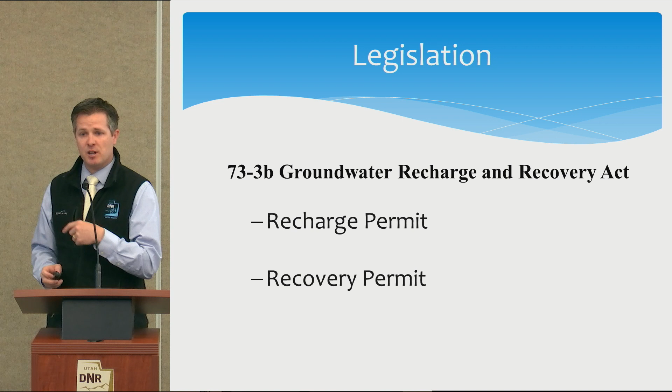A recharge permit is actually a smaller fee than the recovery permit, which is larger. But the recharge permit fee is dependent upon the amount of water you're going to be recharging, or the description of your project. So if it's a very small amount, less than 20 acre-feet, your fee for a recharge permit is just $150 — a very small fee.

The larger the project, the higher that fee goes, and there's just this schedule. It's the same fee you'd have if you were filing a temporary application with us or a change application — it's a standard fee for all those projects. It used to not be that way, so if you're expecting a big, large fee for this, it's changed. It's now just the standard fee if you're doing a recharge application.

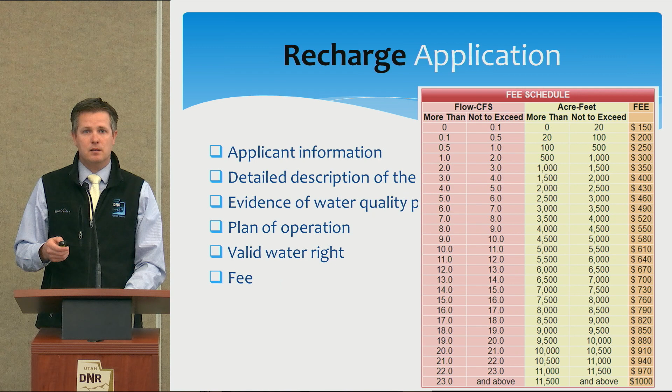Let me make sure here. Yeah, water quality permits. So our application for a recharge application has a condition that you have the appropriate water quality permits required by these other divisions to recharge water into the groundwater.

I'll allow them to talk about their permits, but the thing we require is that you have those permits. We don't make you get them before you file with us, so you can do them in tandem. You could file the necessary applications with their offices at the same time you're filing with our office, but we'll condition your approval on having those permits in hand before you recharge that aquifer. If you do have those permits ahead of time, those are great things to attach to your application. Many times we'll get their application attached to ours to show they've been working with their office and filed those permits.

Many times when they do issue those permits, people will provide that to us as supplemental documentation to show those have been completed. We'll want those at our office at some point, either before or after the application is filed, to know those have been completed and done. But I'll allow them time to talk about those. The key takeaway is you can do those in tandem, not in series.

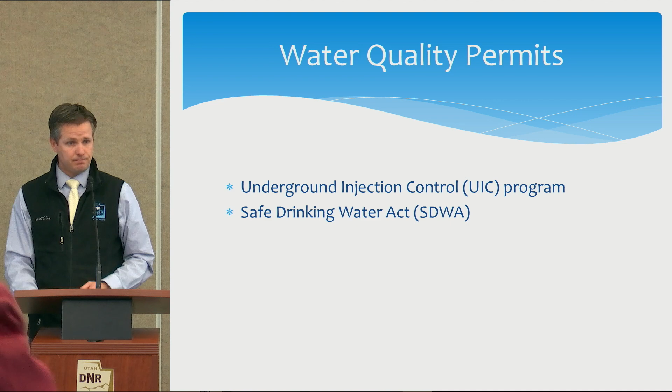Okay, so our recharge application talks about a plan of operation that you need to have when you file for a recharge application. Essentially that's a detailed description of the project. What's your design capacity? How much water are you going to be recharging?

It also talks about a monitoring program. What's your monitoring program? A monitoring program is different depending on the type of application. We don't have set rules saying for this type you're going to do this; we look at each one individually and come up with a program for each. A monitoring program for, say, an injection well type is obviously going to require that you meter how much water you're injecting. That's part of the monitoring program.

Many times we'll also talk about having some monitoring wells set up around that injection. Depending on the project, you might not need any, but you might need some to help understand how much water is actually being recharged and how that water is moving through the system.

For an infiltration pond, the monitoring program is going to be a little different. Let me catch up with my notes here to make sure I don't miss anything. For a well, it's very easy to measure how much is being injected into the ground. For an infiltration basin, it's more difficult to understand and know how much water is actually infiltrating into the aquifer system.

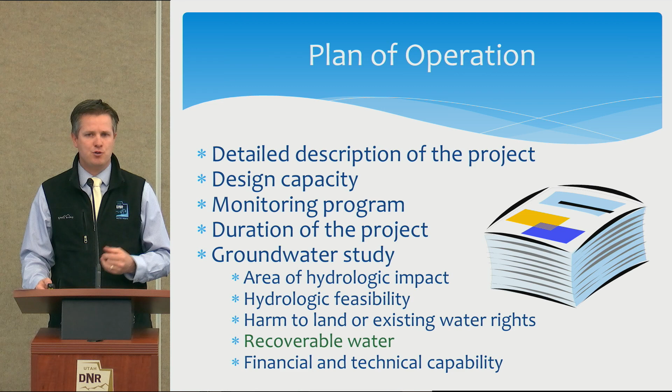And then I've highlighted in green here, how much water do you believe is going to be recoverable from this project? When I talk about the recovery application, I'll talk about what that means in a lot of detail. And does your entity have the financial and technical capability to complete this project? I don't think that's ever been an issue with someone, but it could be in the future for these types of projects.

This plan of operation we're talking about, I heavily encourage entities to do a pilot project, right? A recharge application is a pretty simple application. I believe in our office it's something we can easily act on. So one of the key takeaways here: even for a pilot project, we want you to file a recharge application, okay? There have been times in the past when we haven't required that or have had differences of opinion, but now, if you're going to recharge water in the ground, even for a pilot project, we want a recharge application filed. And I think we can act on those relatively quickly.

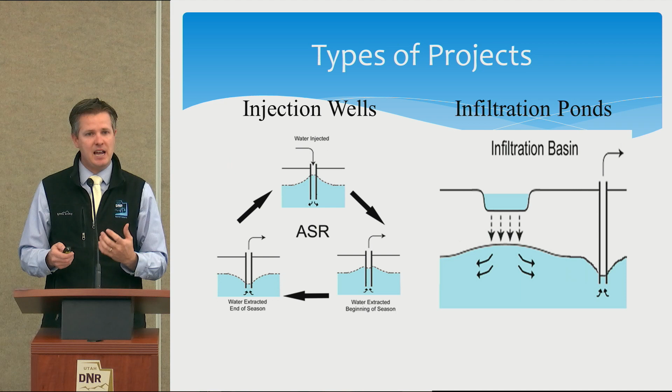Those pilot projects help, and if you're doing an application for a pilot project, you note that on your application. Say, this is for a pilot project. All of this information, the plan of operation, the design capacity, the monitoring program, we're going to develop that with our pilot project, right? So you don't have to have all the answers up front. You're going to use that pilot project to help define those answers. So you file that recharge application. It helps you understand the feasibility and it helps you define all those parameters.

Okay? So later on, when you say, we've done our pilot project, now we're ready to file the encompassing recharge application, you can do another application which is much larger, so the fee might be greater, to say this is our full application based on the parameters of our pilot project. Okay?

So I want to spend a lot of time talking about valid water rights. I'm sure that's probably small to read. I just want it on the slides. All of these slides will be available; I think some have been printed out, but they'll all be available on our website. And this recording will also be available on our website for you to download and view for your future reading enjoyment.

But a valid water right is very, very critical. Okay? To do a recharge project, you have to have a valid water right, or permission from an agreement with another entity to use their valid water right.

And that water right has to have the ability for you to store that water, right? So, for example, you can't take an irrigation water right that has a season of use for the summer, go to a spring that you're using for that water right, take that water out during the winter and store it, and then try to pull it out to use for your irrigation in the summer. If your water right's limited to a summer time frame, you can't go beyond your water right to store that water in the winter time, right?

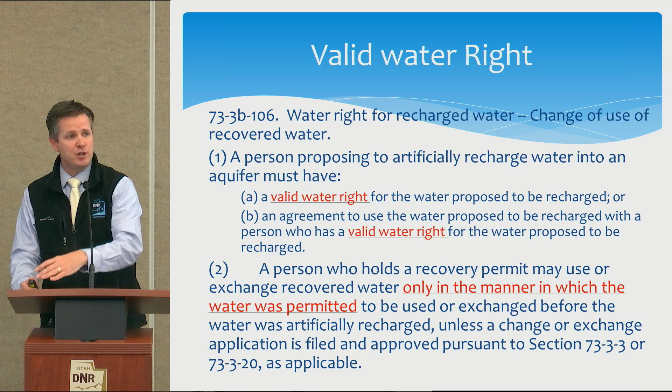So if you already have a municipal water right that you're filing a recharge application on to store in the groundwater, and then you're going to pull it back out to use for municipal, that's just fine. But if you have an irrigation water right or some other type of water right and you want to use it for something else, you have to file a change application when you go to use that water right. Okay? Any questions on water rights? So when you file your recharge application, you're going to point to the water rights that you're using to recharge that water. Okay. Any questions on recharge applications as a whole before I move on to recovery applications?

Okay, so a recovery application, separate. Once again, we need the applicant information.

What's interesting in the law is it's set up that you can file multiple recovery applications on one recharge application. There was this idea that an entity could file for a recharge and different entities would file to recover that water. That's never happened, but you can do that. So you also need the consent from the owner of a recharge permit that you can recover their water. Most of the time it's been the same entity, so we're pretty sure that entity has the consent of themselves to do it. But you would need that consent if you were a different entity.

The recovery application has the wells that you're going to be recovering that water. Many times, if it's the same well you're pumping down, you're going to be recovering out of. But it doesn't have to be, especially for an infiltration basin, right? That infiltration water, you're going to be recharging. You're going to be recovering that water through these wells. So we need all those wells you're going to be using to recover. And the location of those wells is really important, specifically when we get to talk about the parameters of how long we allow that water, that storage account, to remain in the ground before some losses start occurring to it. And I'll talk about that.

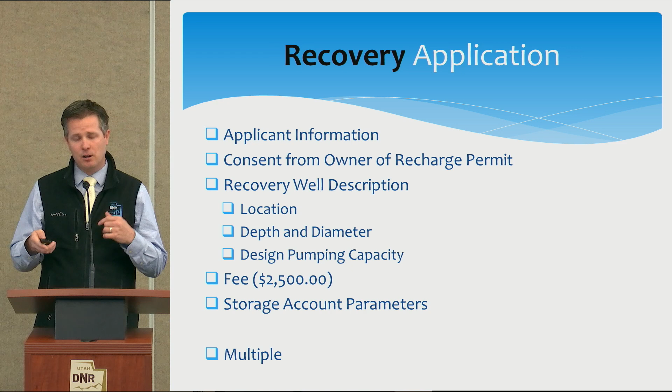Oh, no. First, both recharge and recovery applications have a proof time frame set in statute that you get 5 years from when you get your approval to when you have to get the projects constructed and in operation. You can extend that time and file for extensions of time. There's no limit to how far you can extend those, but it is set that you get 5 years to start. Almost all of these, we're going to permit with some sort of monitoring program that you're going to have to set up, which will be required at the time when you submit proof that you have set up that monitoring program.

The conditions are going to be, you're going to have to report to us how much water is stored and how much water you're recovering under the program. I've already mentioned the water quality permits. We're going to need copies of those when you go to submit proof. We're going to set up this storage account. Interestingly, the law does give the Division of Water Rights the permission to ask for an annual fee on these projects. We've never done that, but maybe if this program gets bigger and we're expending more and more staff time on these projects, we might start asking for an annual fee, but we haven't up to this point.

And the other key thing here that I want to bring up is it's a little different than some of our other applications in the office. This one actually has a provision in the law that says these permits can be modified at any given time based on the request of the applicant. And we've done that in the past, where we've set up a project, it's been permitted, and as they've been running this project over the years, they obviously start learning more and more about the aquifer, about the project, about how long the water stays within their zone of influence, and they request to us, hey, we think those parameters you set up should be modified or changed in such a manner. And we've reissued those permits based on those changes and the new information that's been collected.

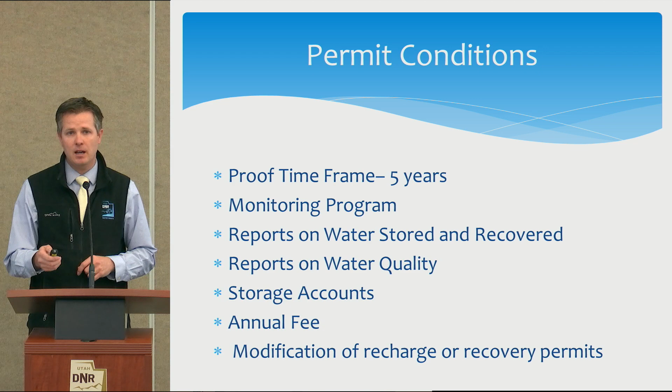So I want to talk about the storage account that gets set up from these projects. When a recharge application gets filed, we set up a storage account. You don't have to file the recovery yet. You can file the recharge, and you can start recharging water. And as soon as you do that, you are required to report to us monthly how much you recharged into the ground. And we will start recording this account, okay?

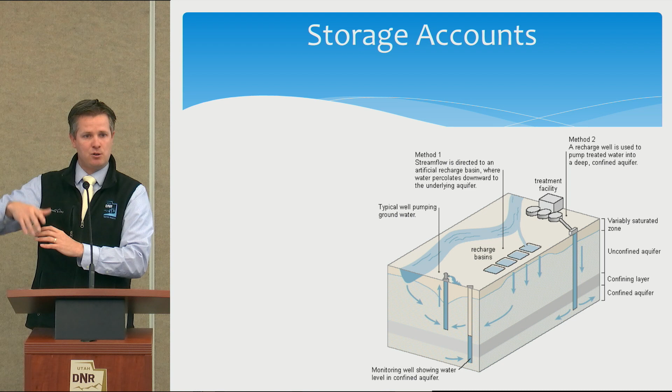January 2018, they put 1,000 acre-feet of water into the ground. We'll put that in there. Boom. February, they put this much. We'll put that in there. And it creates this account. If I have time, I'll show you some of the accounts that we have on the system. And those just start growing. And it's like this bank. We start crediting you all this water that gets put into your reservoir, right?

When you go to file your recovery application, or if you filed your recovery application at the same time, we'll set up what we call storage parameters.

The first one is an initial wait period. What that means is, for every amount of water you recharge, you have a time period where you can recover that exact same amount of water with no loss accounted for. Usually it starts with a year—we've never permitted one less than a year. So if you recharge water in January of 2018, you could pull that same amount of water out of the aquifer with an approved recovery permit in that same year, till the next January.

Some of them are a lot longer, and it depends on where you're at.

Then we apply what is a loss factor. So after that year, we'll say we believe there's, let's say, 10% loss. Jordan Valley Water Conservancy District, the first ASR project we permitted, has 1 year—once they put water in, they can pull that same amount out in that same year. But after the first year, they get a 10% loss to that water, so the next year they can only pull out 90% of whatever they put in the previous year. Two years later it would be 80%, then 70%, and it kind of goes down like that.

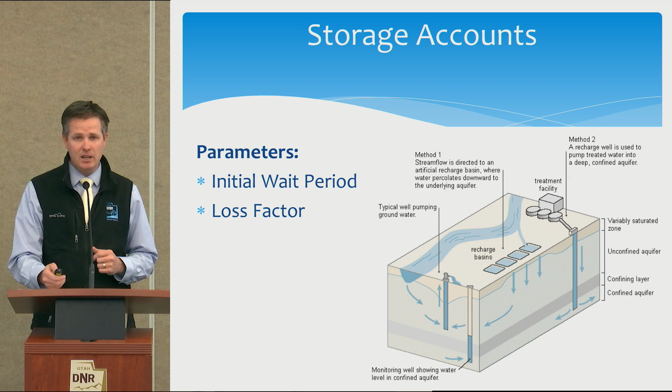Question? Yeah, where do those numbers come from? Your loss—is that based on any sort of study or evidence?

I'll repeat your question: where did those loss numbers come from? Is it based on a study or some evidence? Yes, that's where the groundwater study we're talking about completing comes in—that's where we get that information. We'll look for additional information, but that's where the pilot program really helps us develop those loss parameters. If there's a lack of information, we're probably going to be more restrictive to make sure we're not going to interfere with somebody else. As more information is gathered, we often get requests from applicants saying, 'we've gathered more information, we don't think there's as much loss.' We'll evaluate that and extend those periods based on the new information.

I'll talk a little more about that here in just a second.

Before I move on, I want to talk about month of loss—when that loss gets applied. Normally you'll see three parameters: an initial wait period, where you get a year before anything; then after a year, a loss factor, say 10%, applied in December. That's the month it gets applied. So if you applied water in January, you can pull out that same amount all the way through the next January, and then all the way to the next December before that loss gets applied to that set from January.

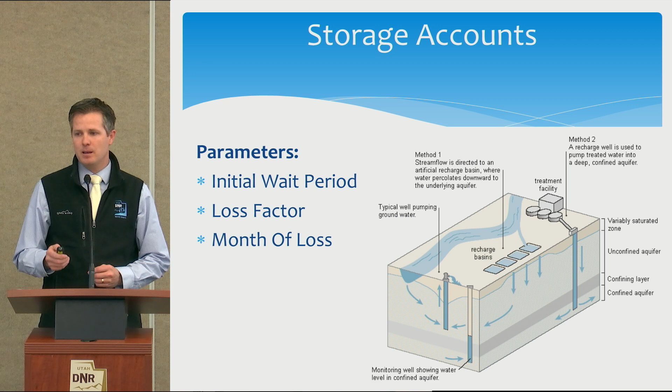So this gets to your point: what do we consider when setting those parameters? The type of recharge matters. If you're pumping water right into the aquifer, that water is immediately in there and starts moving right away—so that's taken into account.

If you're using an infiltration basin, it's going to take a while for that water to percolate down into the groundwater system. We want your groundwater study to help determine how long that takes, because if it takes years to even reach the groundwater system and start moving, we'll take that into consideration—your loss period will allow more time before we assess a penalty to that stored amount in the aquifer.

The location of your recovery wells really matters, specifically in unconfined aquifer systems. Because if you have an unconfined aquifer, that water's getting down into there, and you've got space for that water to fill up, right?

It's going to start moving with the general movement of that system. If your recovery wells are situated such that they'll be able to capture that water for more time, you're going to get more time to be able to capture that water. Now, with your recovery wells, you don't need to pump the same particle of water down and recover that same particle over here. We're looking more at the effect on the system.

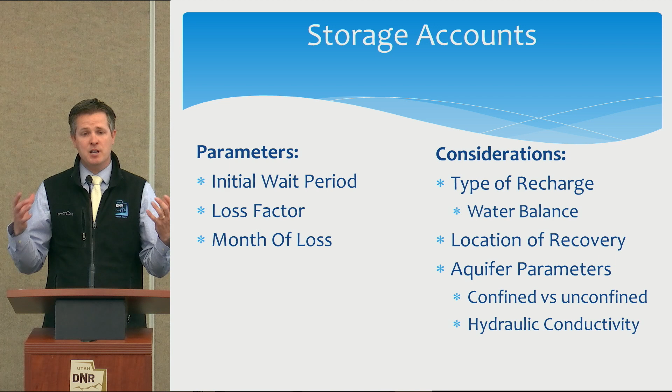They have a set of wells that surround that reservoir down gradient that they can pump that water back out. So they initially got an application that said, okay, we're going to give you a 1-year wait loss period. But after they discovered more time, they now have 10 years that they can store that water in. Now they're actually asking for more time, because they're finding that water going down there is just slowly moving. They think it's going to take hundreds of years before the influence of that water reaches the Virgin River. So they have a lot of time for it to be within their system to be able to pull it back out without impacting or interfering with anybody else.

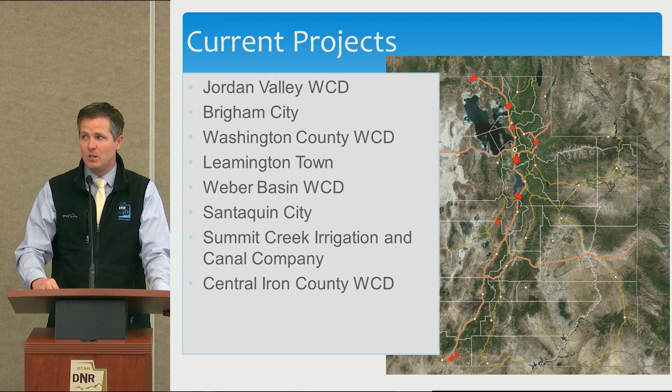Oh wow, I've gone a long time.

We try to make the benefit to that storage account. And that concludes my presentation.

If you have specific questions about your given application and your water right, please come up after and talk to me. Key elements are: there's two different applications, a recharge and a recovery. We set up a storage account when you go to do those. One thing I didn't mention: some entities never file a recovery application—they're pumping water into the ground to bolster that groundwater system because maybe there's a water quality problem, and they're pumping good quality water in there, creating this bubble of good quality water.

But they have other water rights that they already have at those wells that they haven't utilized yet, and they're just going to pump out and use those. So they're not necessarily recovering the water that they pumped in. They're using their other water rights and pulling that same water out and using it. So they're not interfering with anybody else because they've replaced the same amount of water they put in that they've pulled out. But then later on, maybe they get to a point that their city's grown so much and they want to recover that water.

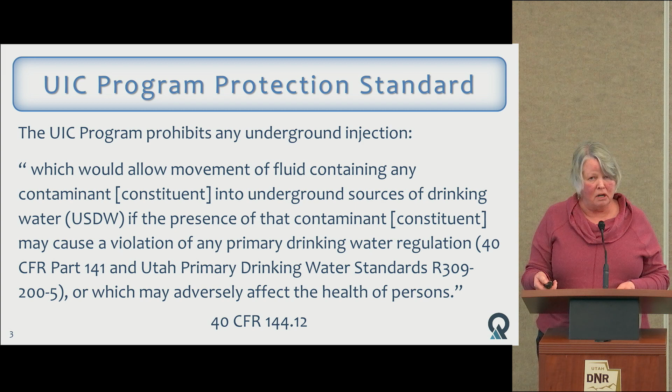Okay, so I talked about an underground source of drinking water. This is a very important concept in the UIC program, and as far as I know, this term is unique to the UIC program. It means an aquifer, or a portion thereof, which supplies a public water system, or which contains sufficient quantity of groundwater to supply a public water system, and either currently supplies drinking water for human consumption, or contains fewer than 10,000 parts per million total dissolved solids, and is not an exempted aquifer.

So let's go back and look at this phrase, 'contains a sufficient quantity of groundwater to supply a public water system.' Well, I talked to my colleagues at EPA Region 8, and EPA has interpreted that phrase to mean that the aquifer can deliver water at a sustainable rate of 1 to 2 gallons per minute, at least. So that's pretty low.

So just about any kind of water that can deliver at that rate and meets the other criteria can be a USDW. Now also the last bit, B, is not an exempted aquifer. This is more relevant to Class 3 injection wells, where they're doing in situ mining of salts or minerals, so I'm not going to get into that. It also applies to Class 2 injection wells, which are associated with oil and gas operations.

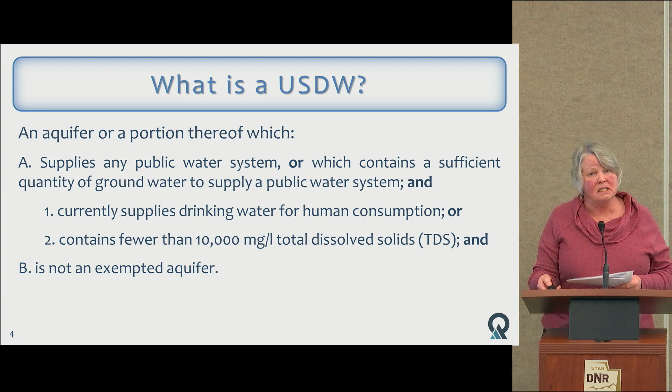So now we've talked about what a USDW is. Let's talk about what an injection well is. This definition is in the regulations. An injection well is defined as a bored, drilled, or driven shaft whose depth is greater than the largest surface dimension, or a dug hole whose depth is greater than the largest surface dimension, or an improved sinkhole. We don't have a lot of those here in Utah, but what that basically means is any naturally occurring fissure into the subsurface, or a subsurface fluid distribution system, such as a drain field, a tile drain, or some such thing, as long as that occurs under the natural gradient of the surface of the ground.

Okay, so I want to clarify a point here. Subsurface penetrations, such as wells or dug holes, may seem to meet the definition of an injection well under the UIC rules, but they are only injection wells if the purpose for constructing these penetrations is for the subsurface emplacement of fluid into the ground. So just because you dig a hole and it's deeper than its surface dimension, doesn't mean it's an injection well, unless you purposely mean to put fluid into it.

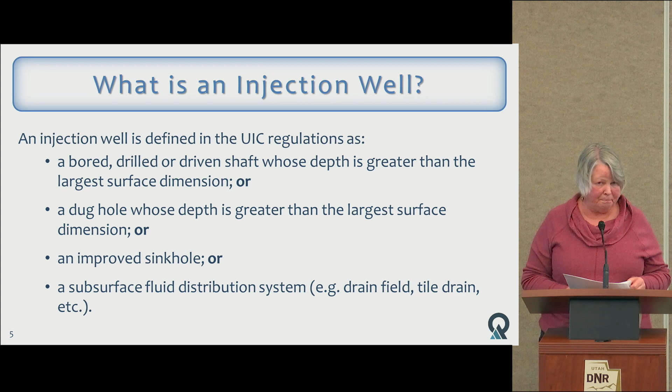It's the state groundwater protection section and the state underground injection control program. The link between the UIC program, which is permitted by rule under the state groundwater rules, states that no facility permitted by rule may cause groundwater to exceed groundwater quality standards or the applicable class TDS, total dissolved solids, limit. If the background concentration for the affected groundwater exceeds the groundwater quality standard, the facility may not cause an increase over background. So we can't inject something that's going to cause the groundwater to exceed what's there.

So if your proposed ASR project involves injecting into a USDW by means of an injection well, as we defined earlier, then you're going to need a UIC permit. But before you do that, come to me. You also want to do what we're doing today. You want to talk to the people at Water Rights, James Greer, the people at Water Resources. They have a pot of money that may help you implement this.

You want to talk to the Utah Geological Survey. Paul Inkenbrandt's here, very helpful in doing the technical assessment, site assessment. Drinking water, especially if you're going to be proposing to use one of the community production wells. And then the underground injection control program here.

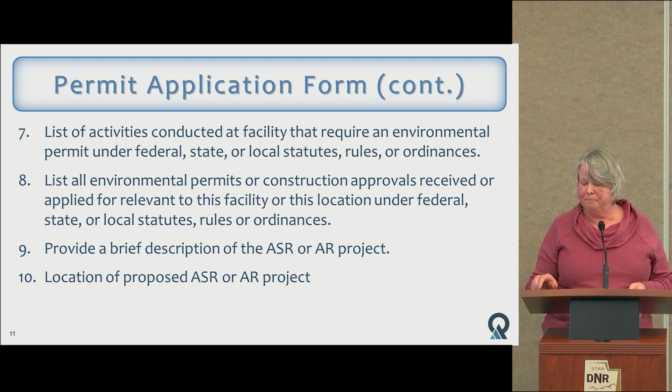And we need a brief description of the ASR project, a location of the ASR project, and whether the proposed ASR project is located on Indian lands.

This is an important one. The reason it's important is because if it's located on Indian lands, the state UIC program does not administer UIC programs on those tribal lands. If the tribal land is north of the Colorado River, you need to contact the UIC program in EPA Region 8 in Denver. If it's south of the Colorado River, you need to contact people in San Francisco, EPA Region 9.

And then we also have a requirement for a certification that needs to be signed - this is also out of the regulations. And we have an additional requirement that any permit application or technical reports being submitted on behalf of the permit need to bear the seal of a professional geologist or a professional engineer.

All right, so any questions on the permit application form? That's pretty straightforward. Okay, so the technical report outline is much more extensive, but as I said earlier, this is all required by the regulations.

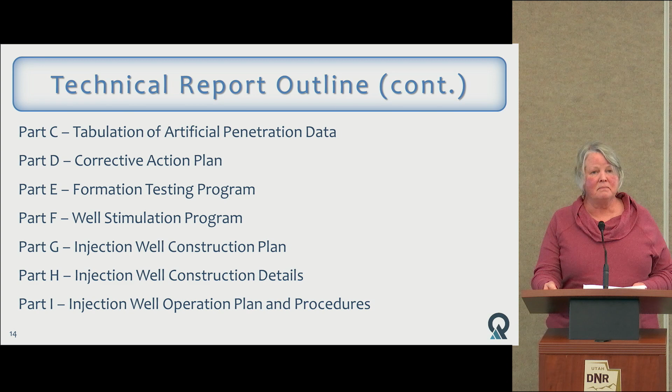I want to just say right now that a lot of this that is required for the UIC permit application looks like things you're going to have to submit to James in your recharge permit application as well. Okay, and then we need a monitoring, recording, and reporting plan.

We need a contingency plan in case something goes wrong with your injection well, you can't do it, there's problems with water quality. What are you going to do if you can't use your injection well to do this? A plugging and abandonment plan.

Now, in reality, what we do is we look, do you have plugging and abandonment plans under the Division of Water Rights, under the Division of Drinking Water? If you have plans, then we're not going to ask for a separate, different plan under the UIC program. We just need to know what you are submitting for other state entities or local entities.

Financial responsibility for plugging and abandoning plan. We need to know that if you're going to walk away from your ASR project and we end up having to plug and abandon this well, we have financial responsibility to cover that.

And finally, and this is something that's unique to the UIC for the ASR project, we would like to see a hydrogeologic assessment report or plan to prepare one, a geochemical assessment report or a plan to prepare one. This should look very, very similar. James requires some of this for his applications as well.

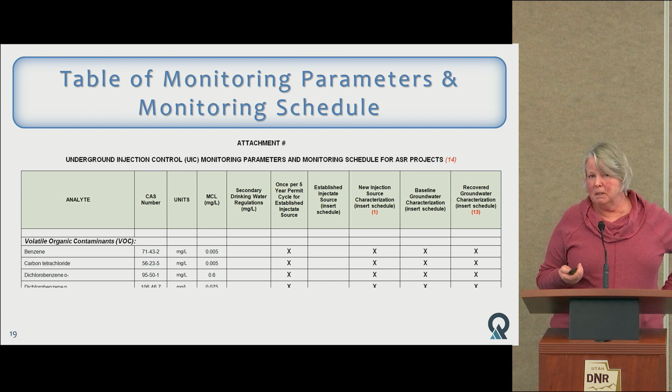And the reason we have done that is because the UIC program, as I mentioned earlier, is a federal Safe Drinking Water Act program, and everything that happens in the Division of Drinking Water, to my knowledge, is also authorized under the Safe Drinking Water Act, okay? So we are both Safe Drinking Water Act programs, and so we want to make sure that whatever the Division of Drinking Water requires, the UIC program requires as well, because the purpose is to protect the quality of drinking water aquifers. Okay, and so this parameter list, this schedule can be as much as 11 pages long.

So, do you have any additional questions for me? My knowledge is pretty much the UIC program, so if you have questions about other programs, that's going to have to be deferred to someone else. I just wanted to let you know that our background in ASR is pretty limited. We have maybe 3 ASR projects using UIC wells, and those are pretty much low-hanging fruit sort of projects in which they're injecting drinking water. I mean, it's drinking water quality already. Instead of going to somebody's tap, it goes into an injection well for later storage.

We are starting to work on some of the more challenging ASR projects. We've had some interest in, what about treating wastewater and injecting it? We're going, oh boy, that's going to require a whole lot more thinking and looking at a whole lot more programs and rules. And so we've been talking to people in Florida, people in California. So if this comes our way, we need to be prepared. But I didn't cover that here because we still haven't fleshed out what that's going to look like from a water quality standpoint. Yes? What about putting chlorine down in the aquifer?

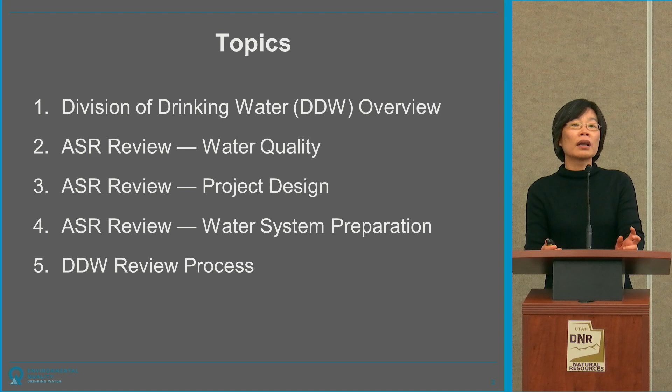Okay. And now I think James did a great introduction on the 3 divisions. So what I'm going to do is first talk about the overview of the Division of Drinking Water, what we do, and why we get involved in ASR projects. And then I'm going to talk about 3 aspects of reviewing ASR projects in Division of Drinking Water: the water quality aspect, the project design aspect, and what water systems can do to prepare for ASR projects. Then I'm going to talk about the Division of Drinking Water's review process.

Now, let's talk about what's the mission. The Division of Drinking Water's mission is we want to make sure we have a safe and reliable supply of drinking water. So when you do an ASR project, when you inject water into the aquifer and try to pump it out to use it for drinking water, it affects the quantity and the quality of drinking water. So that's why Division of Drinking Water gets involved.

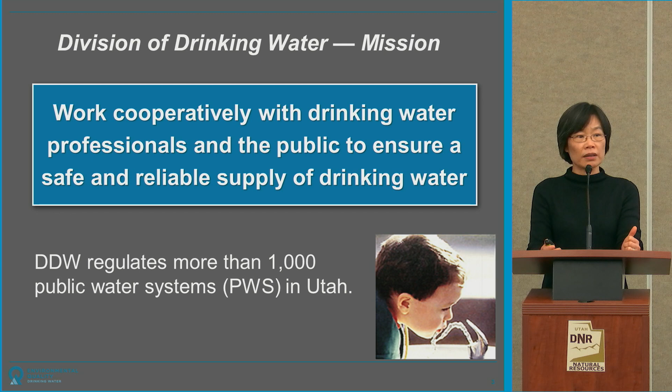Division of Drinking Water currently regulates more than 1,000 public water systems in Utah. So if you try to do an ASR project, the first question you ask: am I regulated by the Division of Drinking Water? Do you meet the definition of being a public water system? So I'm going to talk about the thresholds. If your water system serves 15 connections or more, this water system, by definition, is a public drinking water system.

And we have a fine line that says, under the same ownership or control. Sometimes we encounter some developers, they try to develop a 7-lot subdivision, and the next one is another 7-lot, another 7-lot, to avoid this threshold. So if adjacent properties are under the same ownership or control, we lump them together. So we close out that loophole. Or if a water system serves 25 people for at least 60 days out of a year. How do we define 25 people or 60 days out of a year?

It's not possible for Division of Drinking Water staff to go out like a Costco clicker and count how many people show up during how many weekends. We don't do that. Instead, we look at the population served based on the capacity of the water system. If the water system has a total of 20 cabins, then based on census data, 20 cabins times 3.13 people per household, we say you have about 60 people. So it's the capacity of the system, not how many people actually show up to use these summer cabins.

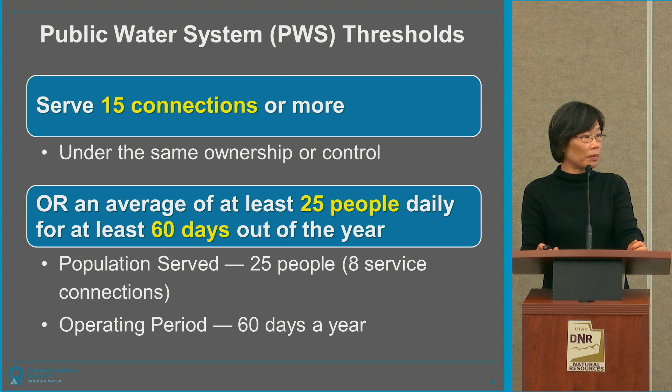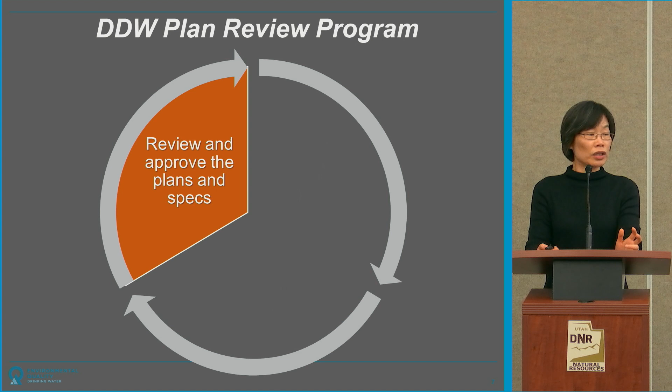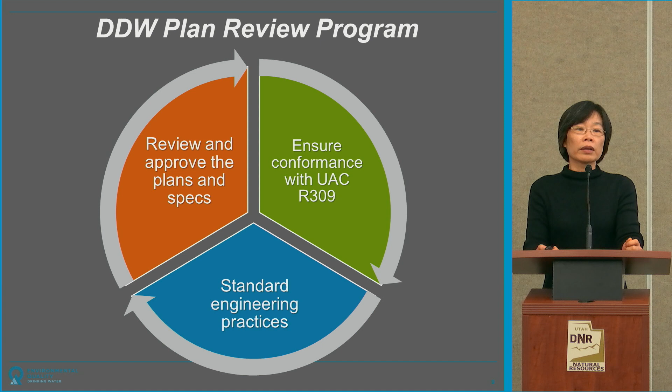Now, the Division of Drinking Water's plan review program requires plan review for projects that would affect the quantity and quality of drinking water. Those are called public drinking water projects. When we require plan review, we have three aspects we do. First, we review and approve the proposed design, including engineering plans and specifications put together by a licensed engineer. Then we make sure during our review that the design meets the regulations specified in Utah Administrative Code R309. We also check whether the design meets standard engineering practices.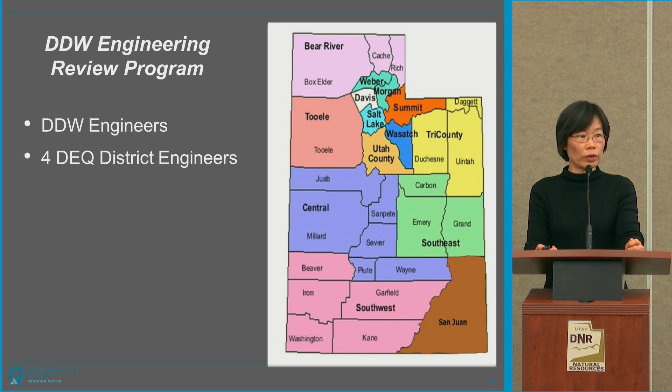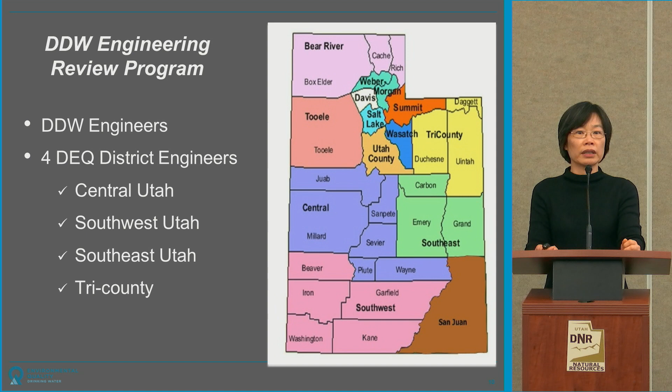Now, the engineering review program administered by the Division of Drinking Water has two groups of engineers doing the review. We have Division of Drinking Water engineers doing projects in the northwestern quadrant of Utah, and we also have 4 district engineers. They are Department of Environmental Quality employees, but they help us with engineering review. They cover 4 districts: Central Utah, shown in purple on the map, Southwest Utah in pink, Southeastern Utah shown in brown in San Juan County and the green colored counties, and the tri-counties, the 3 counties in the northeast quadrant.

Now I'm going to talk about when we review ASR projects, what we look for regarding water quality. If the water you intend to inject is considered groundwater, we require you to show us past results of coliform or E. coli data, so we know the source water is good quality. We wouldn't want you to inject low quality water into the ground and try to use it later. Sometimes we will require on-site inspection. For example, if it's spring water you want to inject, and our on-site inspection shows uncaptured spring water running off with a pond right next to it, we'll consider this spring high risk of being influenced by surface water.

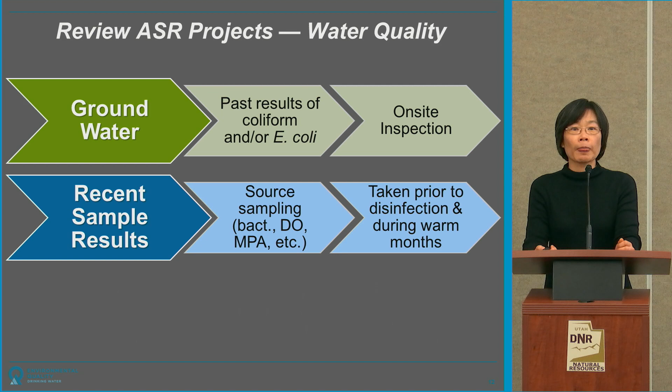We require recent sample results. For example, we want the source sample, the water you want to inject, to include BACT data such as total coliform, fecal coliform, or E. coli. We also ask for dissolved oxygen data, since dissolved oxygen sometimes changes the redox of the water. When water is injected into a groundwater aquifer, it changes the interaction between the water and the geological formation, so sometimes you see water quality change when you try to pump the water out. Then there's MPA, microscopic particulate analysis, a special analysis we require, typically for a spring or a poorly constructed well, to verify whether these sources are subject to surface water influence.

One example: if we require you to take the BACT sample, we will require you to take it at a location prior to any treatment or disinfection, so it's indicative of the true source sample result. We also require you to take it during warm months, because based on our experience, the majority of BACT violations happen during the summer. It's hard to have BACT violations during cold months like January or February, but it's very common for a water system that runs fine to suddenly have BACT problems in May, June, July, August, which go away by November, because bacteriological activity is related to water temperature.

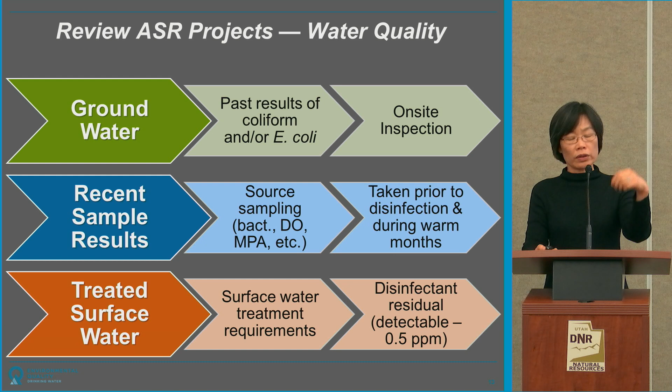So you would think, having more chlorine is better. But Candace mentioned the disinfection byproduct contaminants. If you have too high a chlorine level, it sits in the ground after injection, it's reacting, and you will have increased DBP, disinfection byproduct contaminants. That's why we have a very narrow range of disinfectant residual allowed in the treated surface water you want to inject into the ground.

Now let's talk about design, and I'm going to talk about some examples of the factors we consider in design. For example, when you propose a project to the Division of Drinking Water, you need to identify whether this project is a pilot or a full scale. We need to know that.

For example, if it's a pilot, you may not need to do any modification to the existing equipment. If it's full scale, you may have to modify your well significantly, or sometimes you have to construct a transmission pipe to deliver the source water to the injection site.

Second example is a one well or two wells configuration. Sometimes a water system uses one well - the same well for injection and recovery. Sometimes it's two separate wells, two locations, one for recharge, one for recovery. We need to know how that is designed.

Then you need to talk about what method you're going to use to deliver the source to your injection site, and what kind of method you're going to use for your injection. One example - let's pretend it's a town.

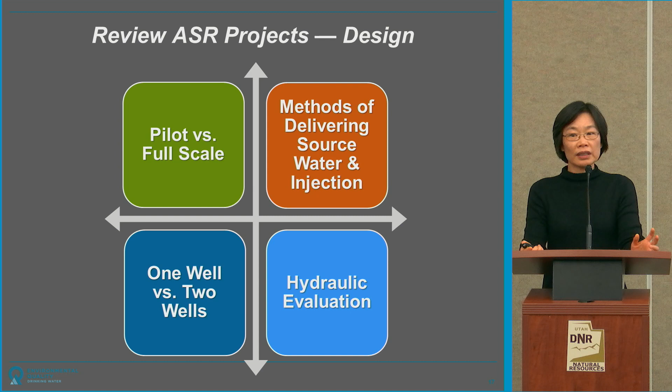They have excess capacity in the spring water. The spring is located on one end of the town, but they have an injection well on the other end of the town. So to deliver the source water all the way from one end of town across the town to the injection site, you have to consider the hydraulics. Does that work? Do you all of a sudden have a 3-inch pipe in the middle or something? So we need to look into that - hydraulic evaluation. All these things need to be considered, okay?

Now let's talk about what public water systems can do to prepare for an ASR project. The first thing they can do is start to gather water quality data - the water quality data from the source, including BACT, dissolved oxygen, or MPA sample results if needed. They also need to look at the distribution system's sample results.

For example, if the source water is really good, you have 3 years of high quality source data - the source is not a problem. But the distribution system, unfortunately, over 2 summers of testing, all have positive BACT detected in the distribution system. When you do your design, won't you think twice?

If your source is good but your distribution is bad, sometimes maybe the distribution system has a lot of old pipes that's subject to contamination. Maybe you should consider not delivering the water through your existing distribution system. Maybe construct a new transmission pipe to bypass the problematic distribution system.

The next thing you can do is gather operation data. For example, if you want to inject the spring water, you've got to have the flow history of this spring. You've got to know the pattern - is this a spring that has a wide variety of capacity, or is it very consistent in its flow production?

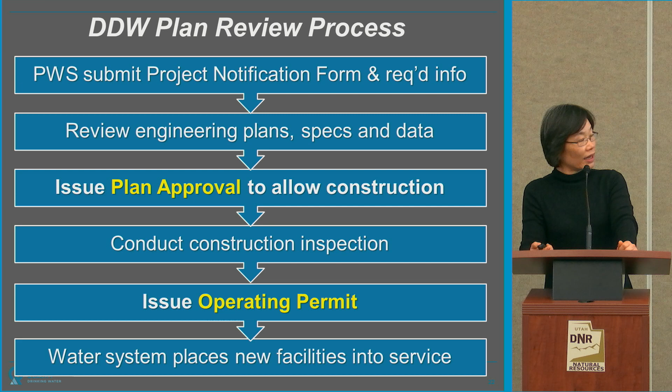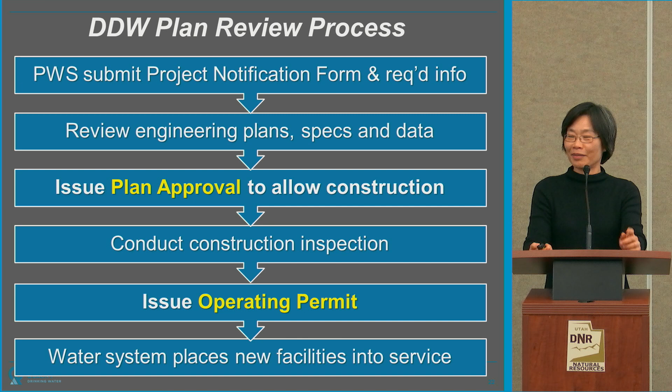I just realized today that folks in the Division of Drinking Water don't have a good sense for business — we do all these things for free, but we don't charge any fee. I may have to go back and think twice about our practice.

Now, when you submit an ASR project to the Division of Drinking Water, I'm going to give you some examples of what information you need to include.

Does everyone have the handout? The handout includes a copy of my presentation slides, and on the second page is a list of the ASR review items the Division of Drinking Water will require. If you have any questions, call us and we'll go through this list in detail with you.

For example, you need to describe what kind of source you're injecting and what water quality data you have. Sometimes you also need to explain the purpose of the injection, because an ASR project could be as simple as wanting to enhance the quantity of water you can use later on. That's simple, but sometimes a water system may propose an ASR project to deal with a water quality issue, so we need to know the purpose of your ASR project.

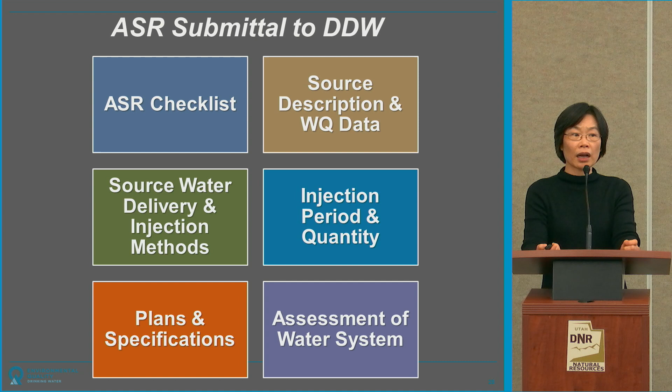You also describe how you're going to deliver the source water and what injection method you'll use, and identify the injection period and quantity to us. You'll need a professional engineer to put together the engineering plans and specifications for the Division of Drinking Water's review. This engineer should also do a thorough assessment of the drinking water system to make sure the ASR project will not cause any harm to the existing drinking water system.

All right, I achieved my goal — I finished this ahead of time. Any questions?

Throughout the last two presentations, the word injection has been used to describe the recharge of the aquifer. Is there a difference between recharge in a well and infiltration in a pond? And is it regulated differently? Is this process different if you're just putting it in a pond?

This is Candace. If you're going to achieve aquifer recharge through an infiltration pond that does not meet the definition of an injection well, as I described in my presentation, then you will need to talk to Dan Hall, who is the section manager of the groundwater protection section in the Division of Water Quality. I believe he's engaged people who are trying to do this. I think it will depend on the specifics of each project as to how that will be regulated, but it will not be regulated under the UIC program if the injection mechanism does not meet the definition of an injection well.

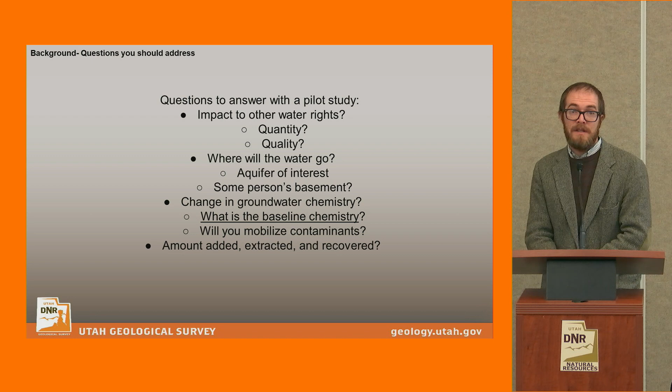One really big concern, and something I spent a lot of time looking at in this Millville study, is how will this affect the groundwater chemistry? Whenever you introduce water from an outside source, or even a different groundwater source, you could potentially significantly change the groundwater chemistry of your aquifer that you're recharging to, and that's a big deal.

So here's the steps I laid out for a successful pilot study, and some of the earlier speakers mentioned these. First thing you want to do is get an idea of how you want to conduct your test, and compile existing information.

There could have been a lot of work done already on your area, and you could save yourself a lot of effort just by doing a little bit of research. Then you want to meet with the regulators and get the necessary permits to conduct your pilot study, which we've already talked about to some extent.

Then you want to look at the background conditions of your site, modify and build infrastructure, conduct your test, and then measure the conditions afterwards. I'll talk about each one of those in detail.

The first thing you want to do is plan where you want to infiltrate your water. Sometimes this requires just a feasibility study, a review of the area you have available to infiltrate water. Things you want to think about: where is the water that you're going to infiltrate, and how hard will it be to get to the site where you want to put that water in the ground?

That was actually a big one for a lot of the areas we looked at in Cache Valley - the availability of water that you could store in the ground.

You also want to examine how you plan on putting that water in the ground - that could be through injection or surface application.

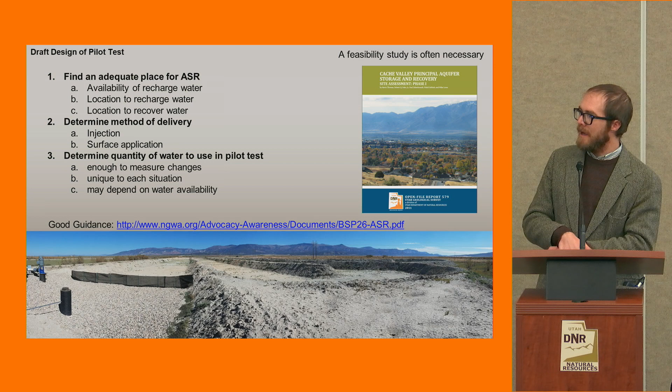Here's where I generally start when compiling existing information. I look at the major agencies who have done any kind of hydrogeologic work in the area - I always go to the Utah Geological Survey and USGS websites first and do a publication search on that area.

The Division of Water Rights also has a number of really good old DNR publications. A lot of them were joint studies between the USGS and the UGS, and they generally have a lot of good hydrogeology information for different parts of the state.

The next thing I do is start to pull together the existing water chemistry data. The groundwater or water quality data portal is the go-to location for me because they pull together data from both the EPA and the USGS.

You also want to look at water level data - I'll talk about that a bit more in a little bit - but both the Utah Geological Survey and the USGS hold groundwater data, and they have a bunch of it available online, so it's really easy to access.

What's really key, especially for pulling together the necessary information for regulatory paperwork, is water well data, and that's all provided. I think all of the water well logs are scanned in now and available on the Division of Water Rights webpage. So that's a very important source of information.

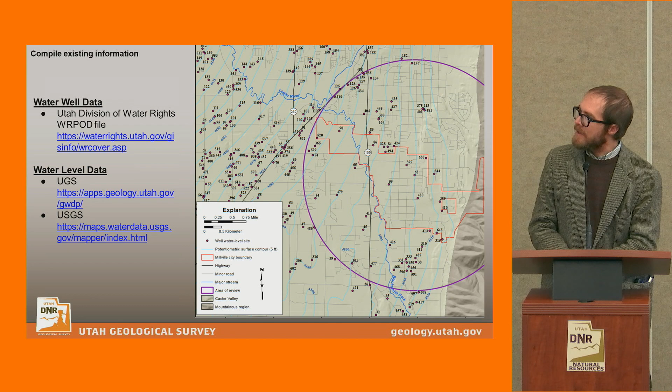In terms of water level data, here are the go-to links for both our clearinghouse and the USGS's NWIS site, which is really key. You can't really see it well on this map, but there's these light blue lines that show the potentiometric surface, or the groundwater level in these wells, giving you an idea of what direction it's flowing. It's also an important part of conducting that preliminary hydrogeologic study for regulatory work.

And then you can use those same well logs to make your cross sections, and that's what these squiggly lines here represent, is the various cross sections we did for the Millville area. So Millville's outlined in red here. This purple circle indicates the area of review. Also could be considered the area of influence. And then all of these different color lines represent the cross sections we did for Millville.

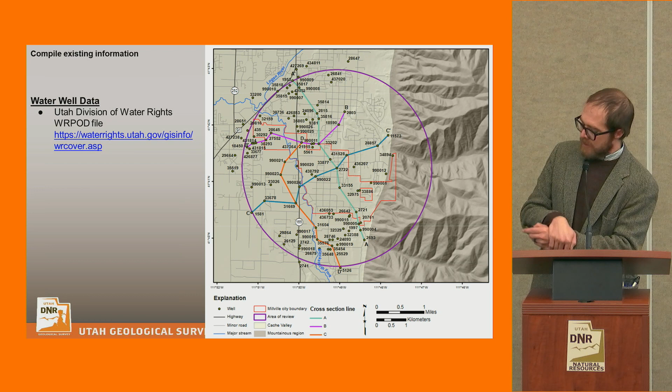And just to show you, you just get the water well data from the well logs, and you kind of interpret what the drillers interpret and interpolate across. And here's the situation in Millville. We have two fairly continuous clay layers and then some more gravelly layers in between. And knowing about the presence or absence of these clay layers is really key, especially if you're trying to decide, are we going to inject this water or are we going to try to spread it on the surface?

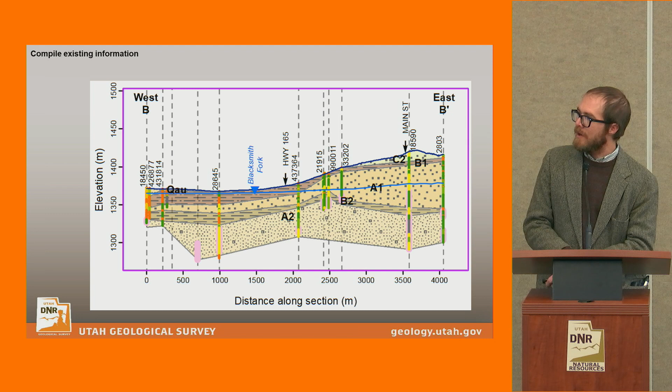Because if Millville wanted to spread this water, let's say on the surface here in this gravelly unit C2, it would probably just come out as springs just downhill, right? So it's really important to know the hydrogeology, and I think that's why it's one of the requirements, making these cross sections and figuring out the hydrogeologic situation, to save yourself a lot of time and headache and effort down the road, and it really drives how your ASR project is set up.

So, of course, you have to meet with the regulators, and I won't go into this in great detail because we just talked about this, but it's really helpful. I found for the Millville project that we had everybody in the same room talking to each other, so everybody's on the same page and there aren't any surprises. You definitely don't want to go dumping water into the ground and somebody call you up later on surprised about it. It's a horrible thing to happen.

So it's good to get everybody in the same room and on the same page, and that's what we did with the Millville project. And I think when we were doing Millville, things were kind of still coming to fruition. All of these agencies were still getting used to the idea of aquifer storage and recovery. So right now I think they have a really good framework in place for these pilot projects, and it should go smoother. And yeah, we already talked about this slide, so I'll skip to the next one.

So one of the things you want to do in terms of measuring background conditions for these pilot studies, you really want an idea of what the water chemistry is like before you put any other water in the ground. Because if you know what the water chemistry is like beforehand and you add something and all of a sudden it goes really wrong, then you have some idea of what happened.

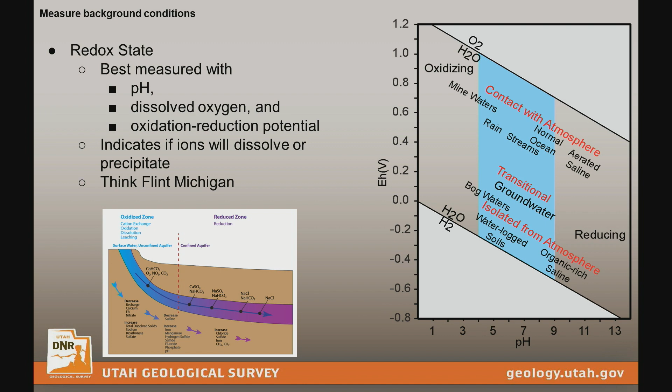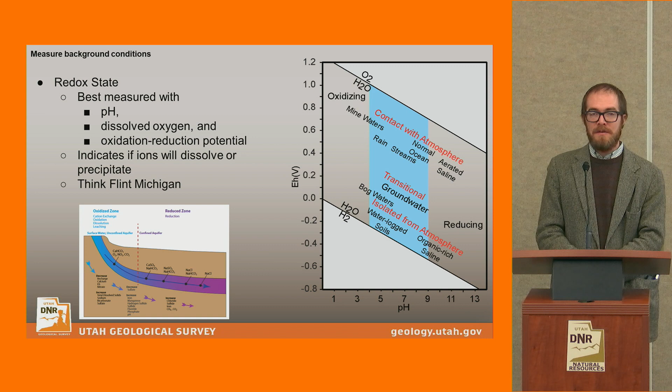And there's different ways you can use just the general chemistry of your water to figure out whether it's oxidizing or reducing. But there's a lot of good documentation out there. There's a really good book on aquifer storage and recovery that goes into great detail. But you definitely don't want to reproduce what happened in Flint, Michigan, where they changed their water source and mobilized metals in their old pipes because of the change of oxidation state. That would not be good.

Another thing we looked at for Millville was the nitrate situation. And that's part of the reason why they approached this. This is the nitrate levels, where red are higher concentrations and blue are lower, in the city of Millville. And it gives you an idea. They had a high nitrate concentration right near their supply well, which is a star here.

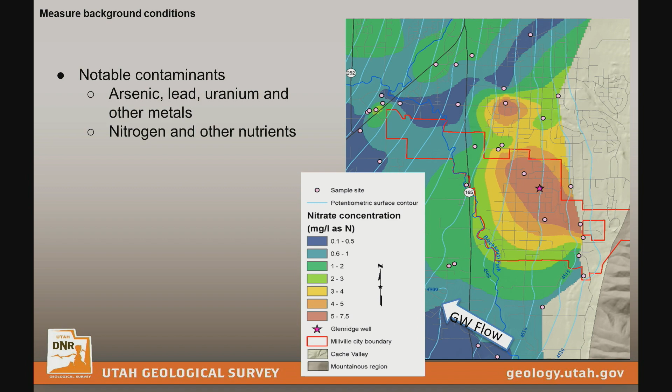And they wanted to try to reduce that by storing some of their spring water from their spring source, which is right around here somewhere, I think. Is that right near the right area? And so one of the things we looked at before we added any water was what are the existing nitrate concentrations.

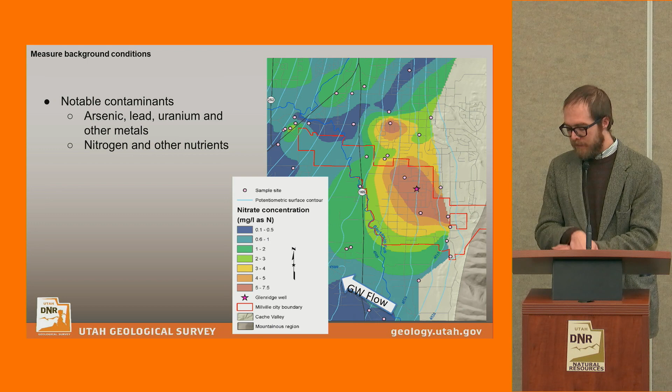And other things you want to probably look at are things that could be mobilized or brought into the water, like arsenic and lead and even uranium in some cases. All of these things could be potentially mobilized by a changing redox situation, and it's something you want to measure closely whenever you're adding a different water to your aquifer. So metals are something we examined while we were doing this study as well.

And then stable isotopes is a huge help. And this kind of plays into the quantity side of things. If you have two very different end members, where your aquifer waters have one specific stable isotope measure and your recharge water is fairly different from that, and you mix the two, you could find out exactly the quantities that were mixed with these stable isotope values.

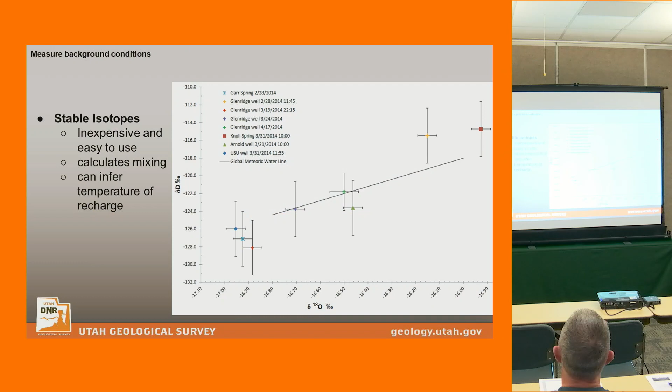And the samples are relatively cheap, and I think I brought a sample with me to show you how big of a sample you need. So you need about that much water, and it's about $7 a sample. But this was a huge help in the Millville study of figuring out how much water we recovered and how much water we put in. And right now we're using the U of U lab to do our isotope analysis, but most colleges will conduct those types of analysis.

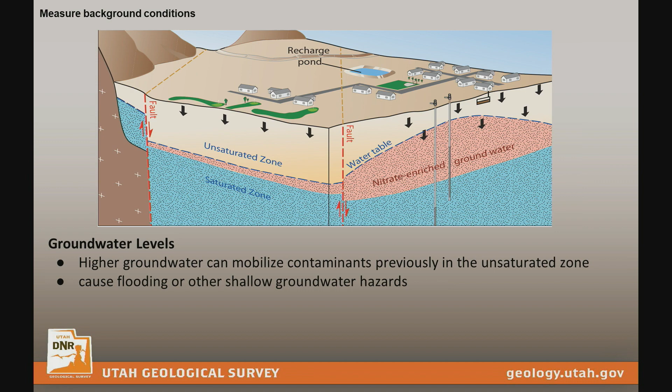So in terms of the background conditions, like I mentioned earlier, another thing you want to know about is where your groundwater table is at. And this is important, not just being worried about flooding somebody's basement, but also potentially mobilizing stuff that's in the unsaturated zone. So if you have a lot of septic systems in the area, like Millville had, and you raise your groundwater level significantly, you could potentially capture a lot of nitrate that's hanging out in that unsaturated zone. So it's something you want to be aware of, and you want to know what your groundwater table is like and how it's changing when you add that water.

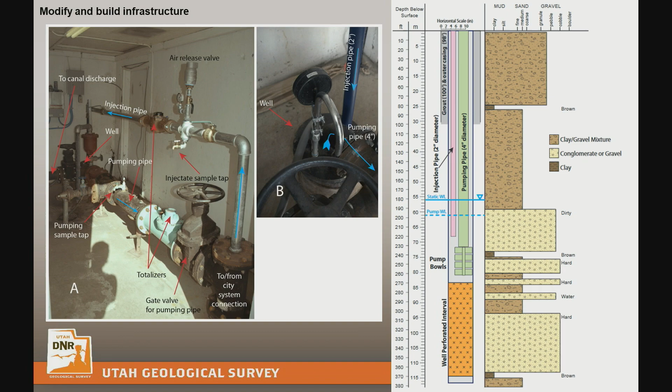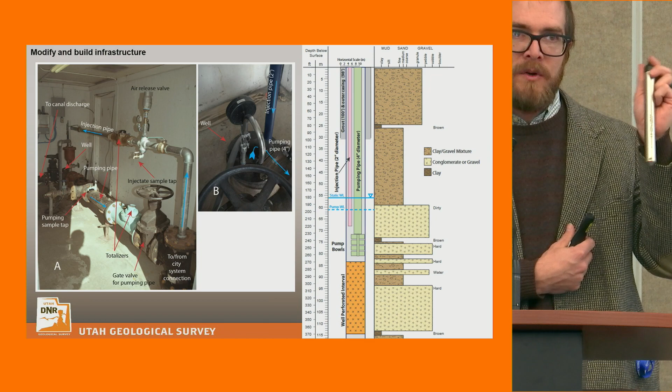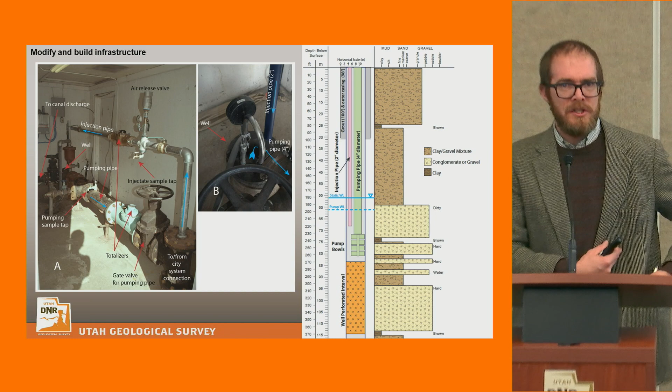And then we had a number of sample points where we could take periodic water quality samples, and those were also key. And then it's also worthwhile to put in some way of measuring water level continuously over time. We use these little pressure transducers a lot, and they can measure water level every second if we want them to. We usually have them set up for hourly, but they're really useful because you can use the water level information both to figure out what the aquifer properties are and also to see how your water level is changing as you inject and pump the water from the well.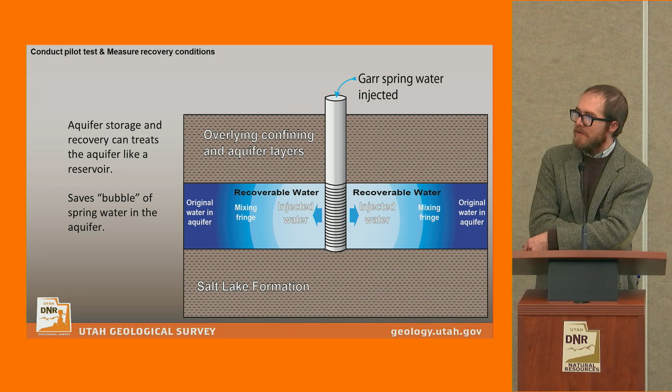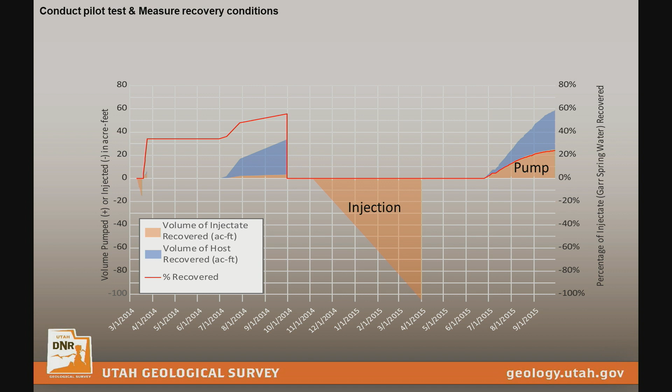And then we did a much larger scale test once we figured that it was possible. Here is the amount we injected. This is a cumulative graph. It shows 100 acre-feet was injected. We let that sit in the aquifer for a few months and then started to pump it out again. The orange is what we were able to recover out of that. So we recovered about, I think it was 20% of what was injected.

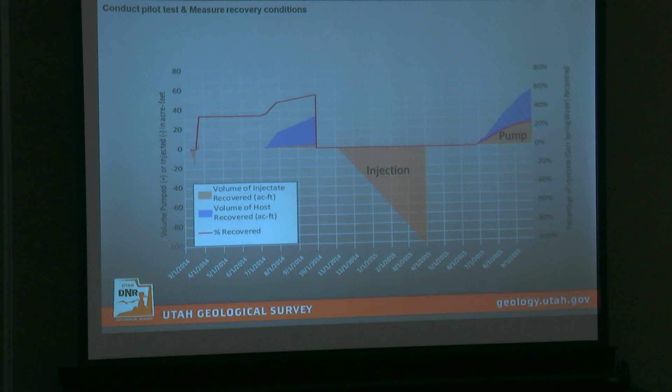We recovered, and this is aquifer water, and this is based on those isotope values. So you're able to get a rough idea of percentages. Nitrate is actually also a really good tracer if you have a large amount of nitrate in your system, but I don't recommend injecting it or anything like that. But it's fairly conservative in groundwater systems unless you have some major changes in redox state. And we use that to verify the isotopes.

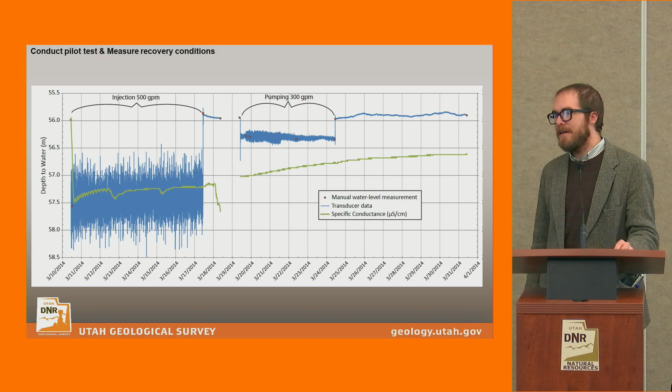I think in the area of the well, it is a confined system. So you do have water above the confining layer in that area. Just to the east, it's unconfined. That's where what I think is the major recharge point for the aquifer is, just up gradient. So you have a confined aquifer where that Glenridge well is, and that's why the water is above the confining layer. Does that make sense? Yeah. Okay, great. I wondered if it affected how you design things. It's important, and James spoke on confined aquifers a little bit when he was talking about the review process, and the residence time and stuff like that.

And this is the nitrate values in various sources in the vicinity of that well. The red line here is the Glenridge well, which we injected into, and you can see it was hanging out right around 8 milligrams per liter. We injected the spring water, and it went down to the concentration of the spring water, of course. Then, as we pumped that bubble of water out, it slowly returned to the concentration of the aquifer water. All of these other lines represent different nearby sources. One that's slightly concerning, and I'm still monitoring closely, is the nearby Alder well, which had an increase in nitrate, but we still need more data to see exactly what's going on with that.

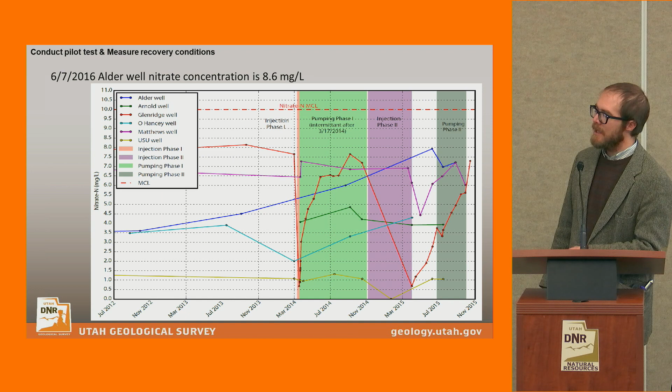And then I saved a couple of videos for the last bit. Hopefully I can get them to play.

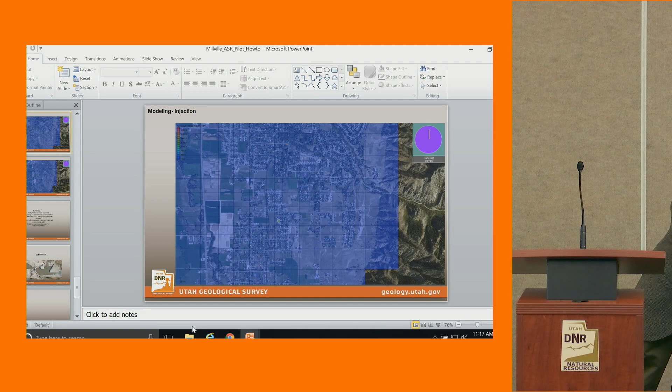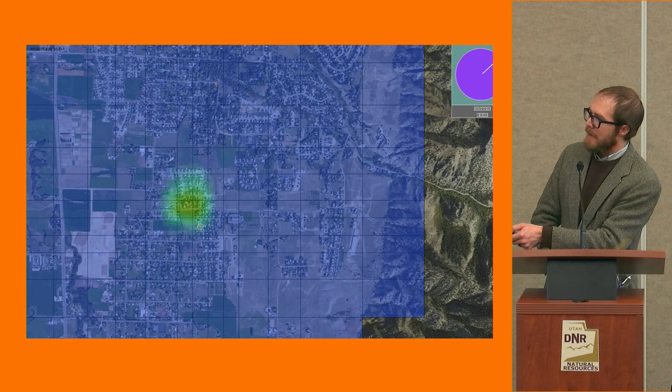So this video is a model. There was an existing groundwater model of Cache Valley. That's the injection bubble going into the well. There's the well. Then they pumped it back out, and you can see it shrinking. Then we had larger time spans showing what was left drifting off. That's from the larger test, just to get an idea of how long we can leave that water in there before it drifts away from our point of injection, and how much of it we can recover. So we're able to show that with the groundwater model as well.

The nice thing about this is you can do different scenarios of injection and pumping, and it will help, especially water rights, make decisions about how much water you can put in and take out. And it also is useful for, I have one more video.

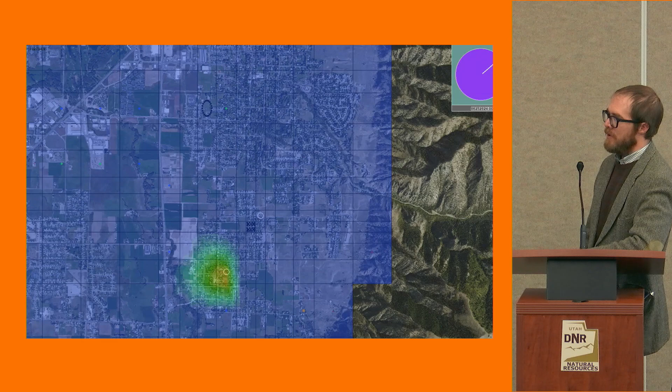It's also useful for playing with the idea of contaminant transport and trying to figure out the source of different things. Or, if for whatever reason you have a contamination in your injection source, you can use modeling to help you figure out where that might go.

In this case, we were trying to figure out where the major source of nitrate in the Glenridge well was. This shows the movement of nitrate through the groundwater system from different points in the city, to get an idea of why we're seeing the concentrations we are in different areas.

So in summary, for any pilot study, knowing what your background conditions are is essential, both water level and water quality. And it's really important, if you're dealing with an injection system or public water supply, to measure all of the mandated parameters, but also for field-based stuff, it's really important to measure your pH, your oxidation reduction potential, and dissolved oxygen.

All of those are going to be very useful for you when you're trying to meet these regulatory guidelines. And then having a well near your point, even if it's a surface spreading site, having a monitoring well nearby is essential.

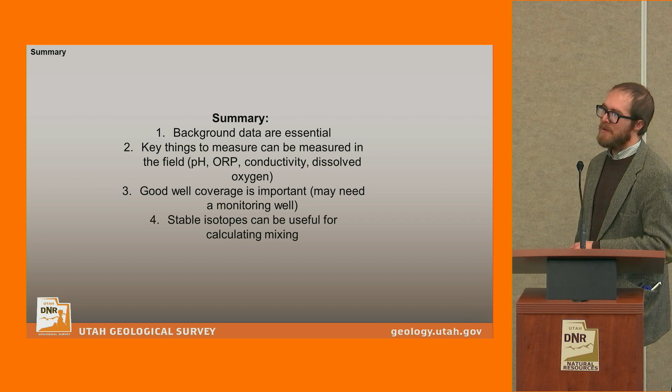Sometimes you can use pre-existing wells, which is what we did in Millville, but you might have to put in your own. It makes a huge difference in understanding the system. And I swear I'm not a salesperson for stable isotopes, but they're very useful for these types of studies. That ends with questions.

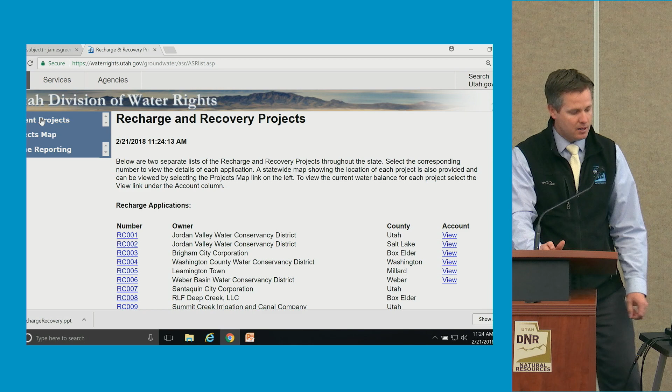Under data, then groundwater, we have recharge recovery projects, and there is a map of all these projects, and a listing of all the current projects that we have. You can click on these links, and it'll give you the full details of those projects, all the reports they've submitted, all the actions we've taken, and all the details for the Division of Water Rights.

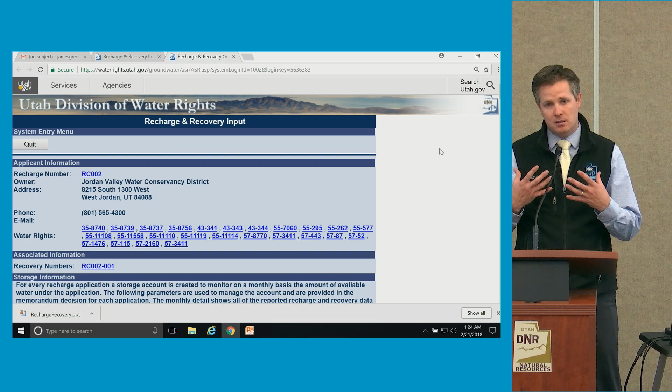Over here, you click and it'll show you the account balance that Jordan Valley's water aquifer storage and recovery is. As you scroll down, you'll see all the amounts they've recharged, all the amounts they've recovered throughout the years, and what is their total available balance of water in that recharge basin, how much loss has been applied over the years for their given project. So any of these projects, we'll set up this account.

It'll all be available online to see how much water you've recharged and recovered. Additionally, this same interface gives a login for the users that are part of it, and they can go add those amounts right online. So all that information is there available for those individuals. So if that answers that question.

I did have a question at the break about the process we go through. Any water right application has a process. We advertise those applications, we take protests of those applications, and it goes through a given process. If you'd like to learn more about that process, we have other trainings that go into detail about those processes, and we actually have YouTube videos that show those trainings. You can Google or see on our website.